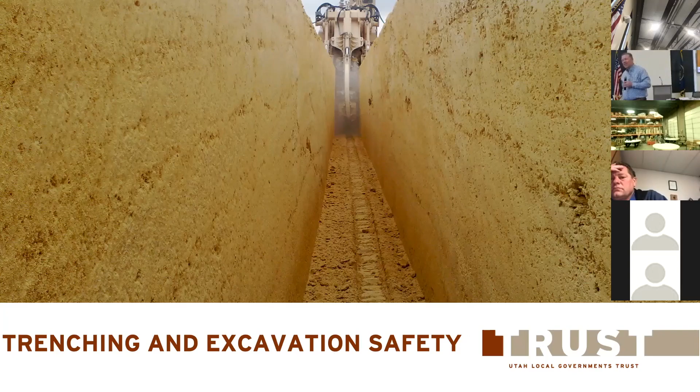Trenching and excavation, man, this one drives me batty. I think any of these fatalities are just absolutely preventable. When I see this come through the news, it just makes me sick. Man, we killed another contractor. A huge percentage of them are in Utah County. If you see a story come through, it's like, oh, another one in Utah County. I know there's a lot of construction going on down there, but it's frustrating.

All right, this one's rough. Don't watch it, you don't want to see people taken out.

And that's what he does as he pulls up. Was that the right decision? No, it was probably the one chance those guys that were in there had to survive, was that air pocket. And then he starts digging.

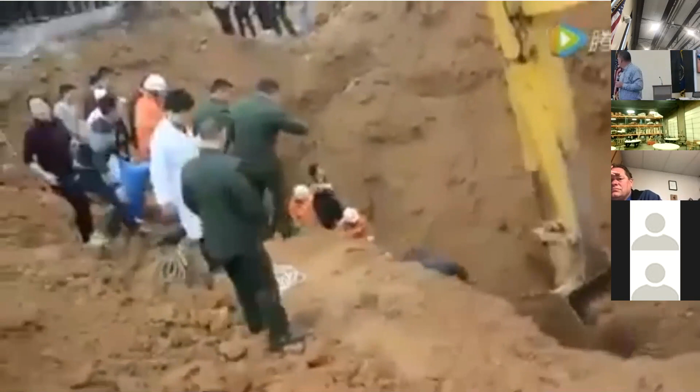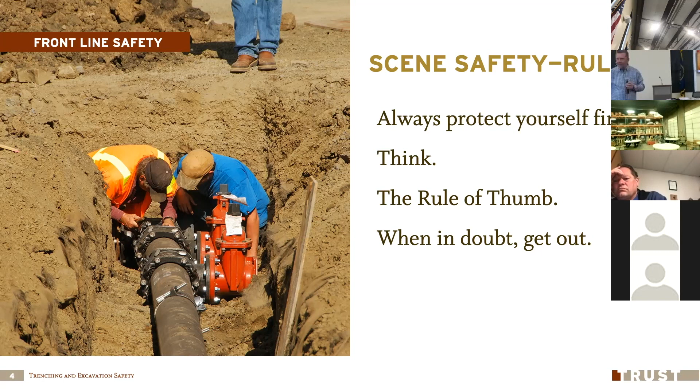But we got to think about, what are these steps if something happens? But more importantly, let's not get to that point. Let's just do it right to start with. All right, so talk about this stuff ahead of time.

Let me get to this, this is dangerous. When fatalities happen, a good percentage of these are dealing with trenches. Trenches and falls are the big ones in the construction industry. And it can happen to any one of us. I remember being a kid out on the farm, and we were digging trenches, installing irrigation lines and things like that, and I had no idea what a trench box was.

I was just a 10 or 12-year-old kid out there plugging pipe together with the old man. And I remember the trench collapsing in around us. We're going along, and I'm like, Dad, this is a little sketchy here, isn't it? He's like, well, hurry up, we're getting behind the backhoe. Probably, if you've been around long enough, we've probably seen that, and we've probably done it wrong at least once or twice. Let's make the commitment today that we're not going to do that wrong, because it can happen and it will happen. It's just a matter of time until we're in the wrong place at the wrong time.

I had one a couple of years ago. My brother calls me and he's like, hey, can you come help me? I'm like, what's going on? He's like, my trench is collapsing. I'm like, you're not in there, are you? And anyway, it happens.

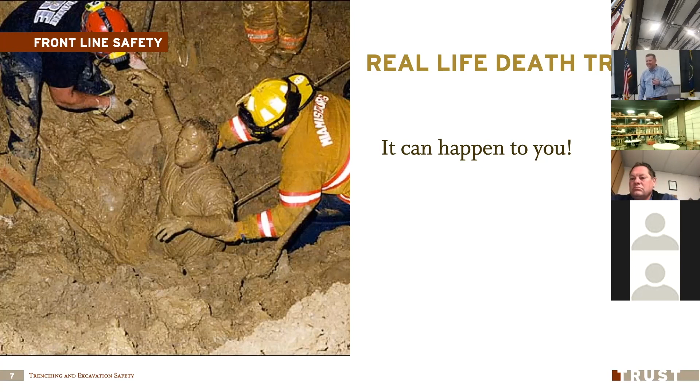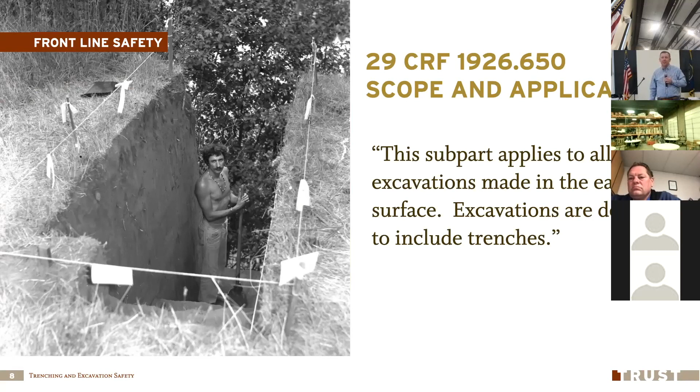All right, so this is an OSHA standard. Once again, that's what we're talking about, is this OSHA standard. And it basically says, if you're in an excavation with certain limits on it, you have to have protections in place.

So what's a trench? It is less than 15 feet in width. What does it mean if it's 16? Well, it's an excavation. So what's the idea with that? Well, excavations are still dangerous, but what makes a trench more dangerous? There's another wall, so when it collapses, it crushes you against the wall, it buries you. If this is all excavated and that collapses, well, the chance that I get thrown away or I'm safe at the end of it is a lot better than in a trench.

We have to have a competent person, just like we talked about in confined space. There's got to be somebody designated that understands the hazards and has the authority to take action on it. If it's deeper than 20 feet, things get really dicey. The physics of a trench deeper than 20 feet get really funky. And so in those cases, we have to have a professional engineer, a registered professional engineer, design this excavation.

Every trench has the potential to kill. Does a 3-foot deep trench have the potential to kill you? It absolutely does. We've had some near fatalities within the trust pool, people in seriously 3-foot deep trenches. Had a guy bent over installing some conduit, and that 3-foot wall collapsed in, folded up his pelvis, and did massive internal injuries. Just a terrible situation in a 3-foot deep trench.

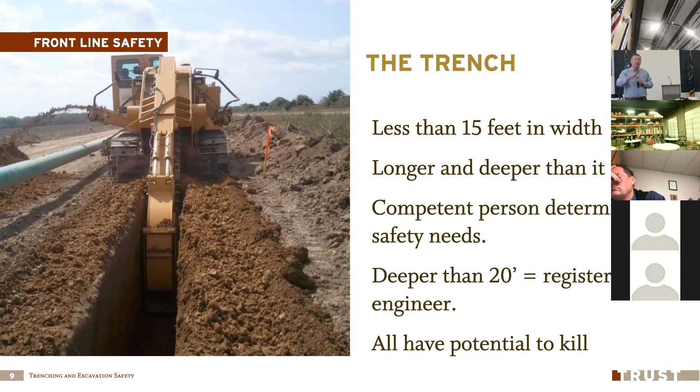So we've got to respect any excavation in the ground. Gravity is going to win. It's going to win for all of us. Eventually, we're going to be horizontal. Eventually, every one of those trenches are going to be horizontal, and those mountains up there are going to be horizontal, given enough time. Okay, gravity's going to win.

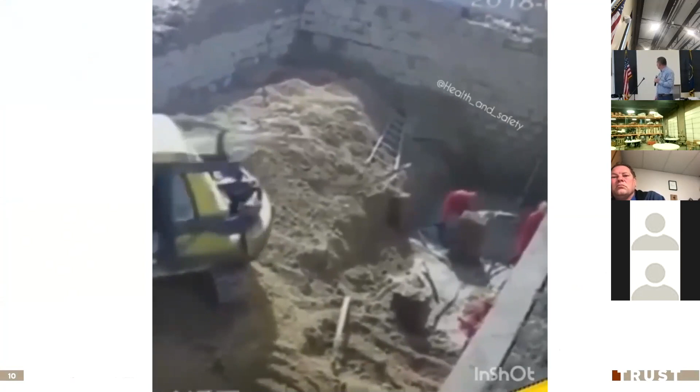Yeah, done deal, right? Concrete wall comes on top of you.

So, a competent person needs the knowledge to identify hazards and the authority to take action. So we designate a competent person.

Now, many of your organizations will have stop work authority for anybody on the job. If somebody sees something that's not right, they think we're going to hurt somebody, anybody can throw their hat in the air and say, let's step back and look at this, I'm worried about this, and then figure it out. That's good. I recommend that for everybody.

Give everybody stop work authority if it's for a safety reason. But we have to designate that competent person who's going to take responsibility. So every excavation job should have a competent person designated.

One of the things I'll send out in the email is a sheet for inspecting your excavation. That competent person should have that in their hand. That's their way to track all of those things and designate them as a competent person.

They need to be there anytime there are employees in the trench. They need to determine the appropriate protection, whether it's sloping, shielding, shoring, whatever it may be. They're going to make the call on that.

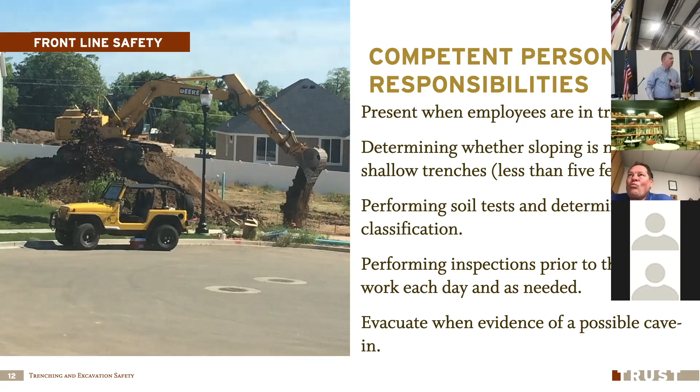Performing inspections prior to the start of the workday and as needed, and evacuating people if needed. If the competent person says, uh-oh, it looks like we might have an issue here, even if it's in a 3 feet deep trench, they have the responsibility of saying get out, let's get a trench box, let's do something, slope it, whatever it may be.

And be aware of the other hazards. Now, are utilities always where they're marked?

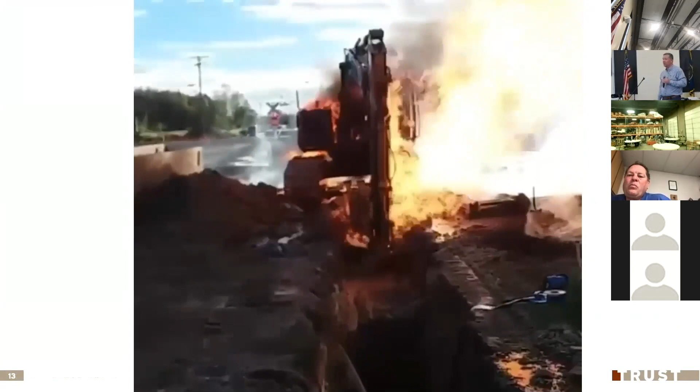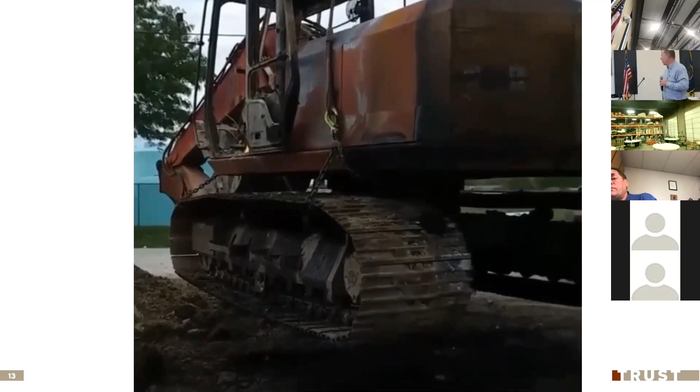So before we dig, make sure we mark the utilities. Sometimes it's you marking the utilities, sometimes we have others out there for others.

How far back from those marks do I need to stay? 2 feet on either side, right? So what do you do in that 4-foot section? You hand dig in those areas. Can you still strike a utility with a shovel?

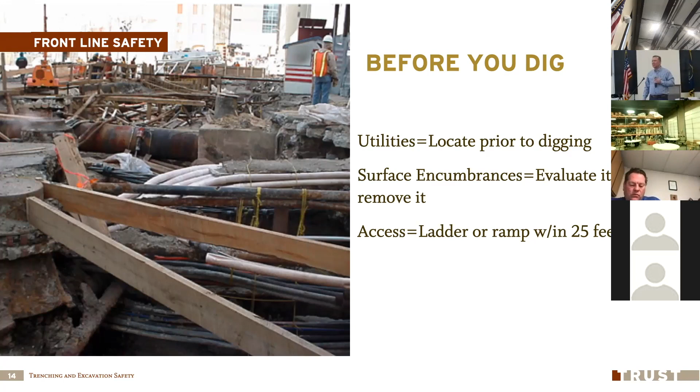Yeah. Okay, surface encumbrances. What the heck is a surface encumbrance? There's your stuff on that. What is a surface encumbrance?

We got it properly shored though, right? Yeah, a surface encumbrance could be asphalt, overhanging asphalt, curb and gutter. It could be a building, something like that that's on the surface that could collapse in on us and may need to be shored. So we've got to take steps to shore those up.

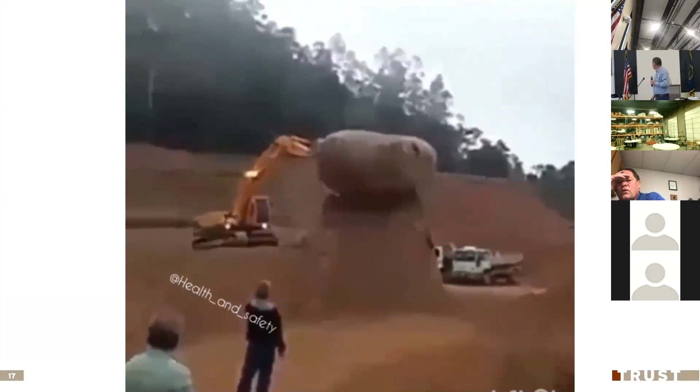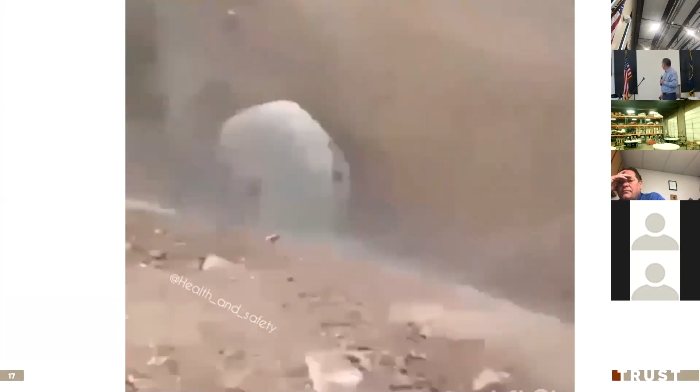They were waiting for this one all day long. It's a boulder. Impressive.

All right, so the other thing that we need to be concerned about is traffic. Most of the work that you're doing is going to be out in the right of way somewhere. So how do we control that? Well, proper traffic control, set that up right.

Does that mean people are going to be smart? Does that mean they're going to stay out of your trenches? I've worked at the trust long enough and I've read enough claims to see that people are dumb. And even with barricades in place, they're going to drive into your trenches. So let's go the extra effort on those things. At the end of the shift, I'm not done with the job, I need that trench open tomorrow. What do we do?

Cover it, plate it, or fill it back in. Don't leave an open trench unattended. If you leave an open trench, people are going to drive into it or fall into it. Kids are going to fall into it. It's a massive liability issue. So plate it or fill it back in. It's easier to dig the second time, I hear.

All right, falling loads. Just an important consideration on that. You guys are working around backhoes, dealing with pipes, installing things, fixing leaks. Do you need to wear a hard hat in an excavation? The answer is yes. I've got potentials, I've got overhead loads there. It's a construction site, you've got to wear a hard hat. But here's the big thing on this.

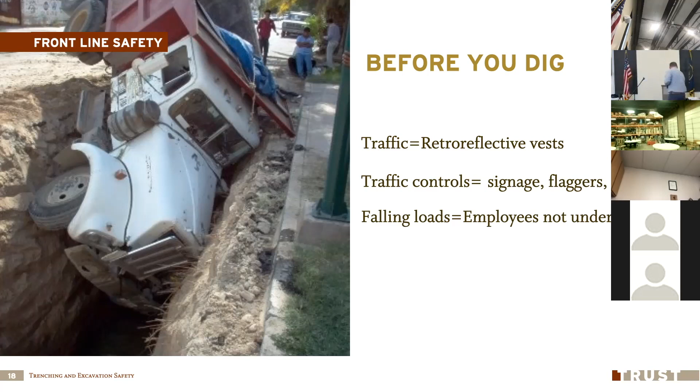All right, and traffic control, right? Wear those vests as well. You know, we may have gotten away with that for a long time without reflective clothing because it wasn't nearly as crazy. But I'm here to tell you, people are not paying attention when they're out there driving. You've got to keep yourself visible.

And when I talk about that, that really terrifies me. Every day I open up my news app on the phone and look at what's happened. And I don't want any of you guys to be dead out there. I don't want you to be hurt in something like that. And I know you're exposed to it day in, day out. You got to work double hard to stay visible and stay aware of what can happen out there, because people are texting along, they're doing whatever it is besides watching where you guys are. So work really hard to stay visible and protect yourself.

If you got to park a dump truck, or you got to put something in the way to give you that extra level of protection, do it. Okay, let's see, got back here. Yeah, I think we covered all that.

It says on there, test atmosphere. Is there a potential that we could have a hazardous atmosphere in an excavation? Like what? Carbon monoxide. Yeah, so if I got a compactor going down in a trench or something like that, I definitely could do that. Anything else? Gas off from what? Oh, gas, like natural gas. Oh, a gas saw, oh yeah. I thought you were talking about off-gassing from something else. But you could have a utility line, a natural gas line leaking.

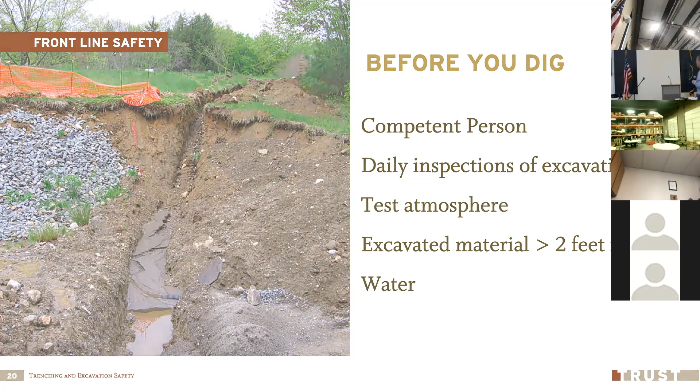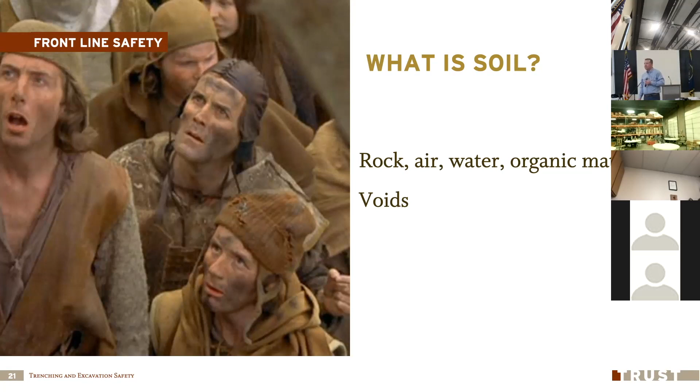Okay, all right, so what's soil? Soil is a combination of a lot of things. Is there air in soil? Yeah, can be. Organic matter, breaking down organic matter. But at its base, it's made out of rock, really small rock. Sometimes it's large rock. Clay is stuff that's been broken down a lot more, and it gets down to a really fine content or fine consistency. All right, so soil is heavy. It weighs about 100 pounds per cubic foot. How many cubic feet in a cubic yard?

Ooh, that's a tough one. 3 by 3 by 3, that's 3 cubed - 27 cubic feet. Times 100 gives us almost 1.5 tons in a yard.

So if that yard of soil collapses on you, guess what? You're toast. We're basically dropping a car on you when that collapses.

This guy that passed away last week - I apologize, I'm just pulling something from the news, don't know if anybody's close to this person - but the guy got buried. They dug him out, and then he crashed and died. Why? Massive internal injuries. Anytime we get this massive pressure there, I think he maintained consciousness until they pulled him out, and then he just crashed and died.

The pressure causes internal injuries, and just the pressure itself, you can bleed out when they take that off. That's another reason why we want emergency responders there if an accident happens, because they have ways to help prevent that when they take the pressure off. If we just dig somebody out, it can instantly cause hypovolemic shock - all of your blood drops out, and it's just like the pump isn't primed anymore.

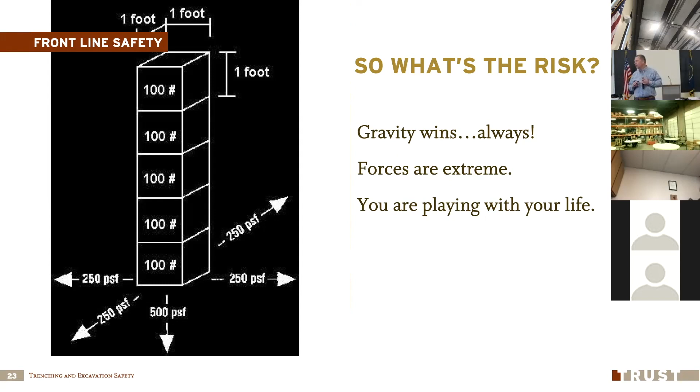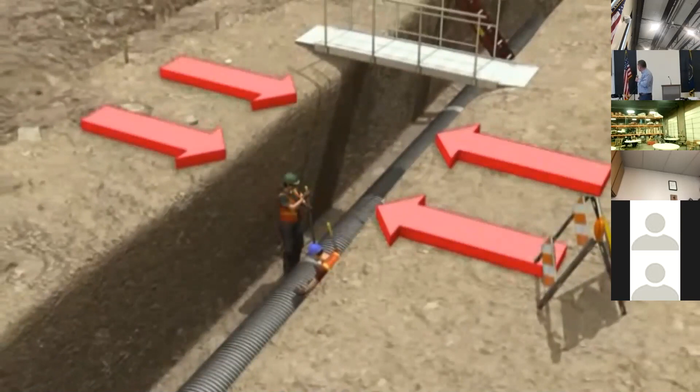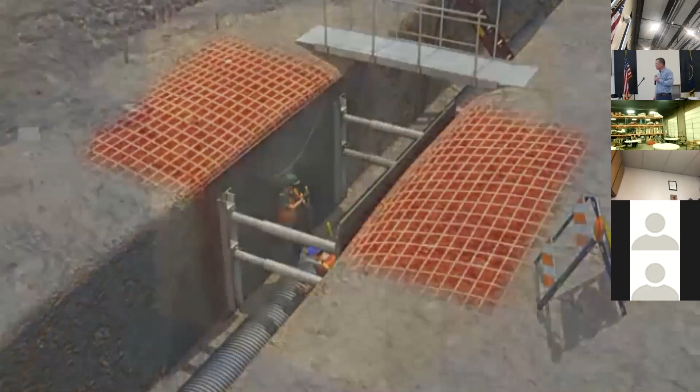What is the purpose of a trench box? Is it to keep the walls up? It's to keep the workers safe. We know it's going to collapse eventually, so we want to keep people safe.

A lot of times we see there'll be a little subsidence at the bottom of a trench. What does that do to the overall trench? Well, it weakens it, right? The bottom of the trench falls away - there's no base, there's no foundation under that wall.

Sometimes collapses are a multi-collapse event. I get that little kick out at the bottom, but I just keep working because we've got to get this pipe in. Then there's a secondary collapse, and it pushes me against the wall and pins my legs. Generally I'll have at least one person in every class I teach trenching that's been buried - some people buried up to their ankles. I'll ask the question, you could just pull your feet out, right? The answer is no. The weight, the pressure involved with that, you're there.

So I'm buried to my ankles or my knees with that secondary collapse. Now what? Do we jump into the trench and start digging me out? No, because when I go to jump into that trench, I may cause the third collapse, and it might be both of us totally buried at that point. Now, am I going to throw a shovel into a guy? We're not going to do that, right? Because we're going to do it right.

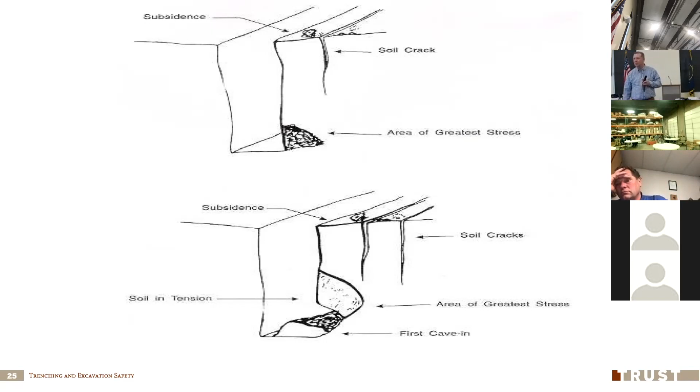But let's say I came on that situation, and there's a guy buried down in there up to his ankles or up to his knees. Yeah, I'm going to give a shovel to that guy, give him a chance, right? At least we'll be able to find the shovel as we're digging him out, and it'll let us know that we're on the right track to finding the guy. Okay, all right.

So, various different types of collapse. Sometimes we get our spoil pile too close to the edge. How far away should my dirt pile be from the edge of the trench?

What'd you say, 2 feet? At least 2 feet from the edge of the trench. Why? Weight, right? The more weight I have on there, the more it's pressing down on the edges of the trench.

The other thing is sometimes it can just slide. That's the spoil pile slide, where it just slides off the top of the trench. Similar to that is the lip slide, where that very top part of the trench a lot of times gets broken up as you're digging it. That's the lip that will slide in.

The belly slough is one that we might see. You said North Salt Lake's got variable soils, so sometimes I've got layers of soil. Maybe I've got clay on top, then a layer of gravel, and then clay in the bottom of the trench. What's the weakest part? Well, the gravel is. We get this belly slough where the middle of the trench kicks in. Now what do I have?

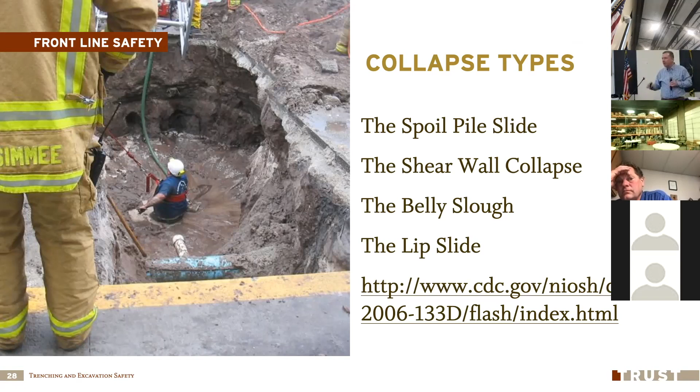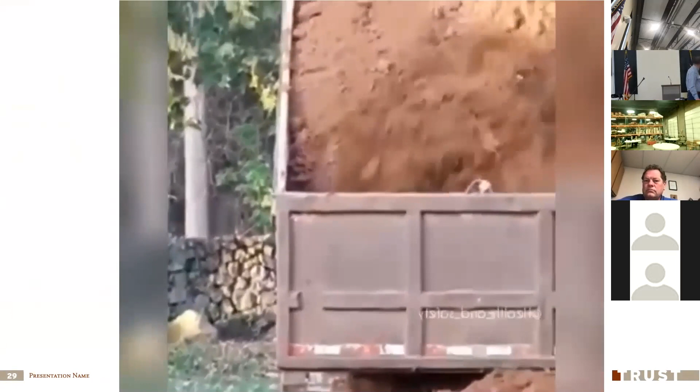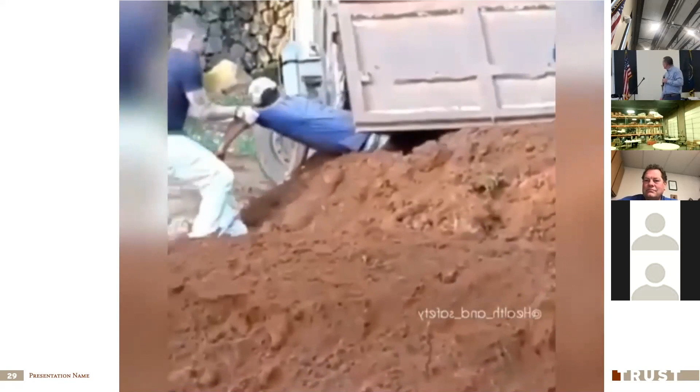All right, oh, this one drives me batty. You can tell when it's a real video, right? Because they pan away, they miss the money shot. Oh, just drives me batty.

All right, so let's talk briefly about types of soil. I have 4 soil types. One is solid rock. Now, we don't generally see a lot of that in most of our areas, but you go down to Moab, you can have slick rock, right? I've got sandstone. That's the most stable soil we have, right? If I can chip a trench through that solid rock, it ain't going anywhere.

Okay, then we have gravel, sand, and clay. They're the general types of soil that we see, and there's a lot in between those different types.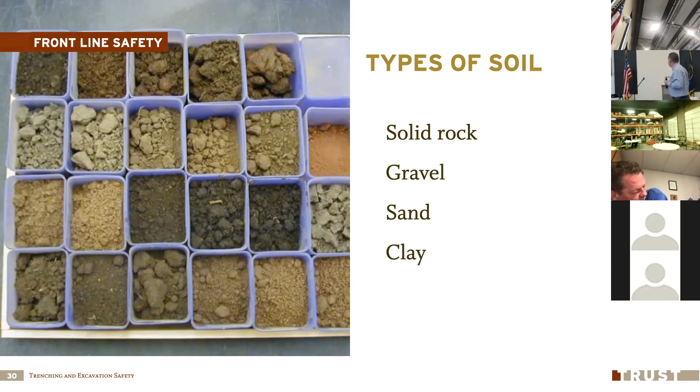Of the other 3, which will be the most stable? Clay. Will it always be the most stable? No. Why? What can I do to clay to make it unstable? If I get it wet, it can turn to jello.

All right, so we're going to classify soil though, and we have solid rock, and then we have 3 classifications, type A, B, and C. Which is the most stable, A, B, or C? Type A is the most stable soil. C is the least stable. And here's the rule: treat everything as if it's type C soil, and then you're covered.

Okay, when do we use type A, B, or C? The only time I use that, besides just my general knowledge of, hey, this is a type C soil, this is a lot more at risk for collapse. The only time I really use this information is if I'm sloping. So if I dig a trench and I want to use sloping as my protection, if it's a type C, I slope it 1.5 to 1, and then I'm covered. So of all the time we spend on this, that's really what it's all about.

Type A, B, or C is my slope. It has to be a lot flatter on type C soil. Okay, so always treat it like that. But we do want to identify it, the different types.

So I do at least one manual and one visual test. A visual test, I look at it, and I'm at a gravel pit, and I can see cobble rock rolling out. What is it?

Well, those particle sizes are really big. The bigger the particle size, the less stable it is. So you think of that compared to clay. You can't even see the particle size in clay because it's so small.

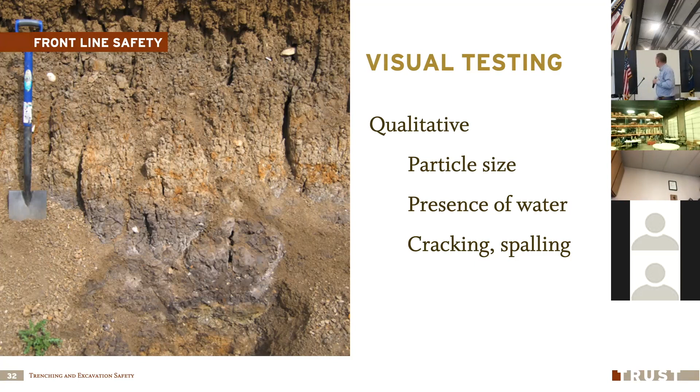So, particle size. Gravel can be type B or C. What's the difference? It's angular gravel versus round gravel. What's the difference between river rock, gravel right out of a gravel pit, and crushed gravel?

How does it... it what? More edges, and so it locks together, and so your angular gravel can be type B. It's a little more stable. But once again, I go back - treat everything as type C, and then we're protected.

Sand, you guys know what sand is? Then we have silt and clay, and so our particle size gets smaller and smaller on those.

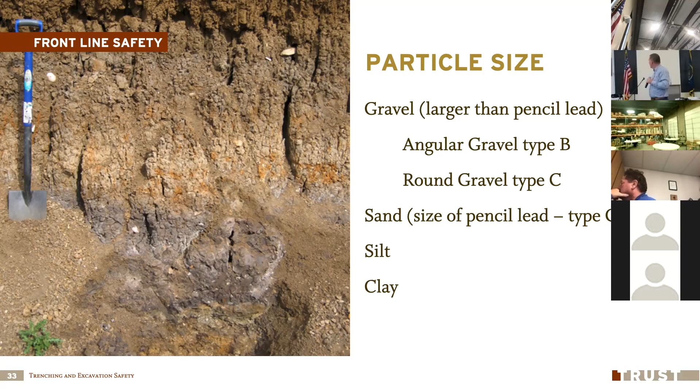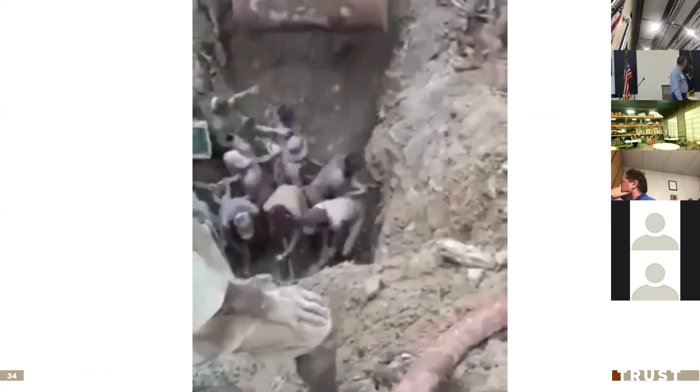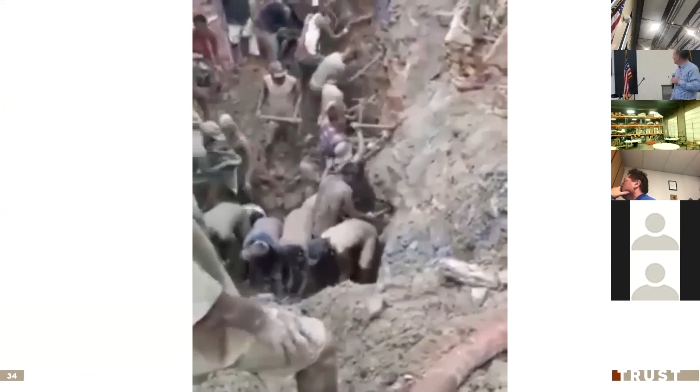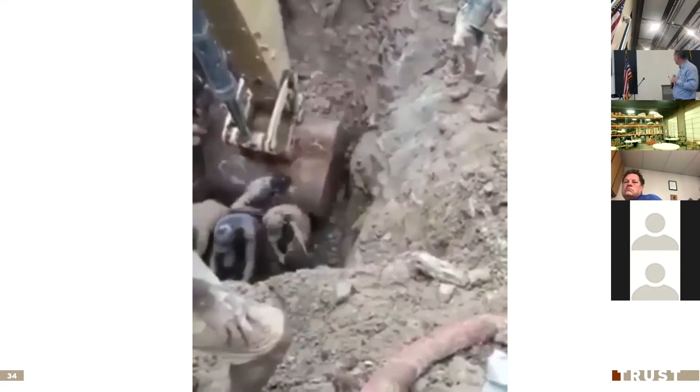Oh, another one. That's when actually they don't get buried, but... I think it's diamonds, yeah. And the crazy part is then, he's just going, he's just digging, and everybody has to bail out. And then they dive right straight back in. Is that amazing? Oh. Or how many people that weren't coordinated.

So here's some warning signs for soil. If I see cracks in the soil, that's just a warning sign that says this is less stable. Spalling, the little flakes coming off. Sloughing - what does that mean?

Yeah, it just slides out, kicks out of the bottom. Heaving, what does that mean? There's pressure coming on that.

Boiling? What's boiling? Have you ever seen at the bottom of a trench, you may have water in there, and you'll see little particles bouncing around? What's that telling you? It's telling you I've got water, I've got hydrostatic pressure there forcing water into that trench. What does that tell me? That's a huge warning sign, right?

Not only does this trench want to tip over because of gravity, but I've got water pressure forcing through here. And as that water moves, it's weakening all of that soil, okay? Water equals danger in a trench.

All right, so those were visual tests, then we do manual tests. We want to test the cohesiveness of the soil and the compressive strength. Cohesive means how sticky is it? Okay, so I've got my - I'm not going to get Play-Doh on my hands today.

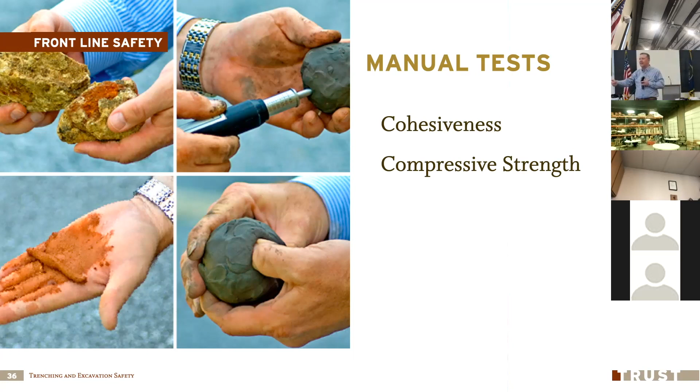Compared to - we go out and we have some heavy clay here, dry heavy clay, and I take that and I try to shove my thumb into that clod. I can't even dent it with my thumb. Okay, that's one of the tests that we can do, called the thumb test.

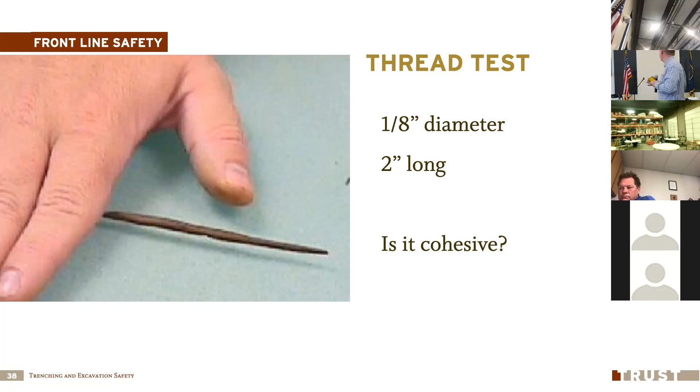We'll talk about the thread test. If I take this Play-Doh, I can roll it into a thread about 1/8 of an inch. And if I can pick up about 2 inches off the table without it breaking, we'll say that is a cohesive soil. Another test we do is the ribbon test.

I do a similar thing, roll out a little bit bigger roll of this, and then start squeezing it, making a ribbon out of the soil, and let it roll off the side of my hand. If I can get a couple of inches hanging off the side of my hand, then that's a cohesive soil.

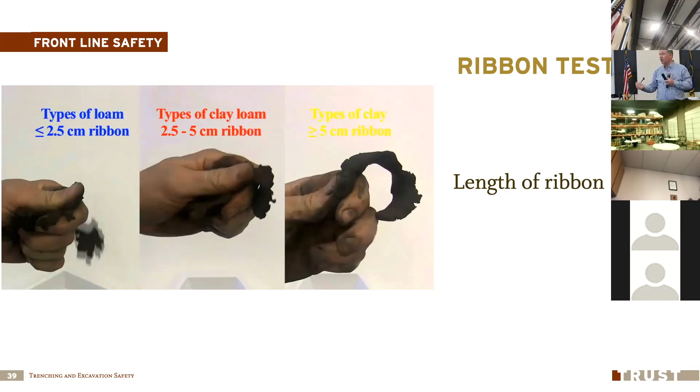Okay, just go back to the other side. If it's sand, is that going to work? It's not going to work. So you'll get it if it's cohesive soil. You grab some in your hand and start working it, you'll get an idea pretty quick whether this is cohesive or not. The thumb test, like I talked about, put pressure on it.

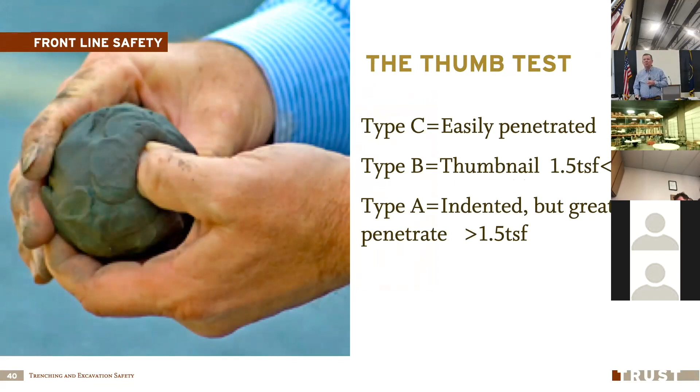The thumb test is good for just a quick qualitative test, but it doesn't give me much, because everybody's thumb is different, right? Everybody gives a different amount of pressure. So we have tools that we use for that.

We call this a pocket penetrometer. It's spring-loaded, you can see this moves. I'll put this little red band down here, and push it into the clod. On here, about a 1/4 inch in, there's a red line. I need to push it into the clod until it penetrates to that red line. When I do that, it's going to put pressure on that, and then I'll look, and it says 1.5.

1.5 translates to tons per square foot. So with type A soil, it's 1.5 or greater tons per square foot. Super easy way to read it.

If you're the competent person, you should have one of these on your excavation sites. OSHA shows up and says, 'Hey, who's the competent person?' And then the competent person walks out with a pocket penetrometer and their sheets showing their inspections. It's a good day, as long as you got a trench box in, right?

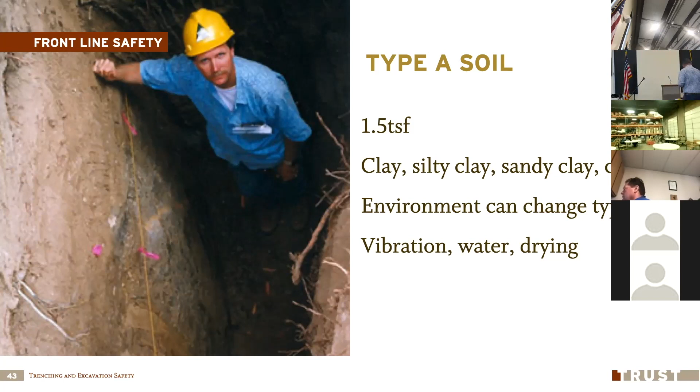All right, so that's an easy way to test the compressive strength. There are other ways to do that as well, but we won't go into those today. It's not a type A soil. So going back to our reading, 1.5 tons per square foot and above is type A soil. In between 1.5 and 1/2 ton is type B, and less than 1/2 ton of pressure on that compressive strength is type C soil.

It's not type A if it's fissured, if it's got cracks in it, if it's subject to vibration - you jiggle this stuff and it starts turning to jello. If it has been previously disturbed - how much of your soil that you're digging has been previously disturbed? Most of it, right?

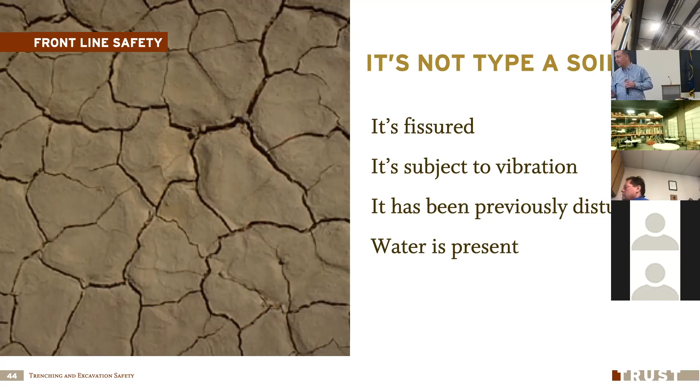So that's why I just come back to treat it like type C. I'll go through the training, we talk about, well, this is type A, and that'll help you feel a little bit better about your trench. But if we treat it all as type C and handle it appropriately, then we're protected. If water's there, it's not type A.

Vibration is also another big factor, particularly out in an area like Woods Cross where we are - is this soil subject to, they call it, liquefaction in earthquakes? Is this subject to liquefaction in this area?

Yeah. You know, it was funny, back in March when we had that earthquake, we were all in lockdown. I was working from the home office, and that earthquake hit, and I was like, wow. And I looked and I'm like, well, nothing's breaking, this is kind of cool. And then I talked to some of my coworkers, and they lived in an area where it was much more subject to liquefaction. They were terrified of this earthquake. They were like, everything was falling off the shelves, everything was shaking around, and their kids were freaking out.

And they were terrified of what happened in this earthquake. That's when we start talking vibration, that's really what we're talking about - some soil, when it's subject to vibration, will just turn into jello.

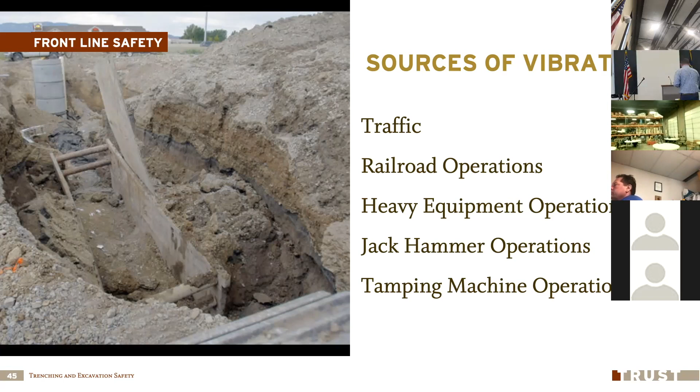All right, so we talked about all of this stuff. I'm going to jump into the next topic.

We had one a few years ago, fire department, out on a bad wreck on the freeway in wintertime, slick roads, foggy conditions, and a semi comes barreling out of the fog going fast. They're standing out there trying to deal with the wreck, and this firefighter backs up to get out of the way, and he backs into the fire engine. He's standing right next to the fire engine, and the semi blows along and runs over his feet.

This guy was a few extra Big Macs away from dying, right? He's sucking in the gut so he doesn't get hit, anyway, it's just amazing that we didn't kill him. Got to stay visible, do what you can to protect yourself.

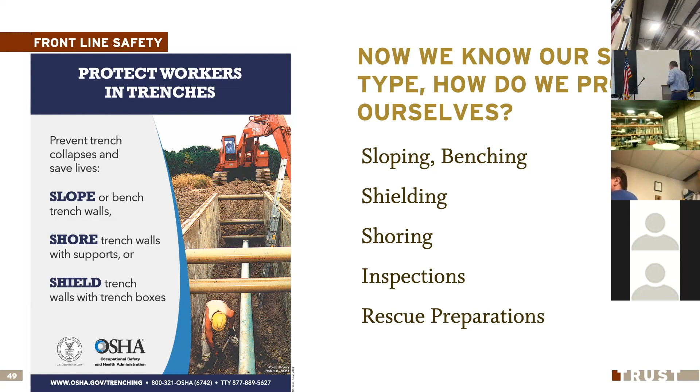Okay, all right, so let's talk about these things. Uh-oh, here we go. I think you can make it.

So at 4 feet and above, or deeper, we need to have something to help us access that trench, meaning a ladder, a ramp, or something to help us in and out. Under 4 feet, I don't have to have that. I can climb in and out.

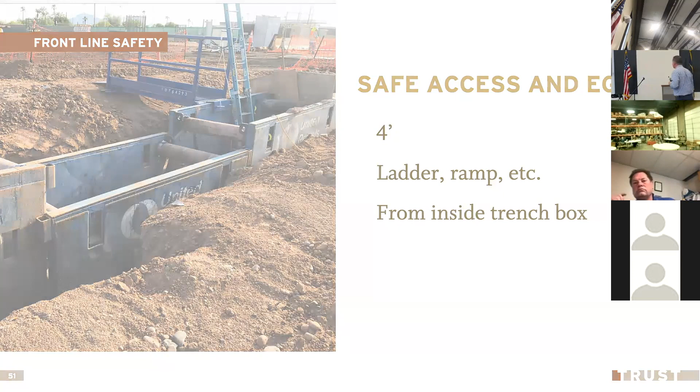Now, if I've got a ladder and I've got a trench box in there, where does that ladder have to be? Can I have it outside of the box? No, I've got to use that from inside the box, so it's not exposing me to collapse.

All right, and appropriate protection for crossing trenches. Here's the OSHA standard on this. It says each employee in excavation shall be protected from cave-ins by an adequate protective system designed in accordance with paragraph C of this section.

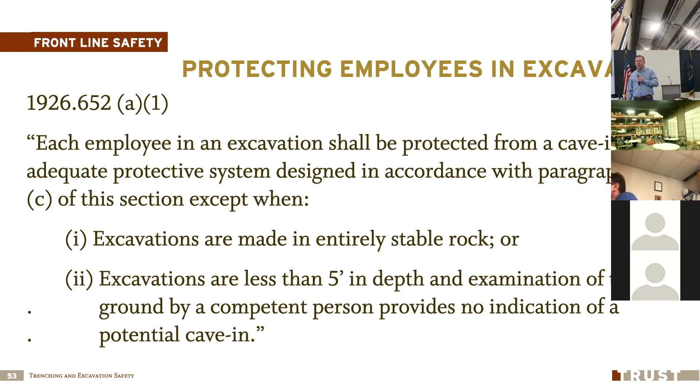Except when it's in entirely stable rock, or excavations are less than 5 feet in depth, and examination of the ground by a competent person provides no indication of a potential cave-in. So a competent person is essential on that for the less than 5 feet. Questions?

It's better with sound, actually. It's that nice aluminum bat sound. Cling. All right.

Sloping or benching. Now, the difference between sloping and benching is what? With benching, I'll dig my initial trench, and then I'll raise up, and I'll dig another trench along there, and then raise up. But with sloping, it's an actual slope. But the angle is the same for sloping or benching.

So if I'm in type A, 3/4 to 1; type B, 1 to 1; type C, 1.5 to 1. Not going to spend a lot of time on that because we're going to call everything type C, slope at 1.5 to 1. What do you find if you are sloping 1.5 to 1? It's a big excavation, right? It generally is not going to work in most cases because it goes so wide.

So if you go online, there's a website, trenchsafety.com, and they have a trench slope calculator. You can put in the width of your trench, the depth of your trench, the type of soil, all of that, and it will tell you how wide. It'll give you a diagram and show you how wide you have to go to get the proper sloping. Guess what trenchsafety.com sells? They sell trench boxes. Why would they put a sloping calculator on there if they're selling trench boxes?

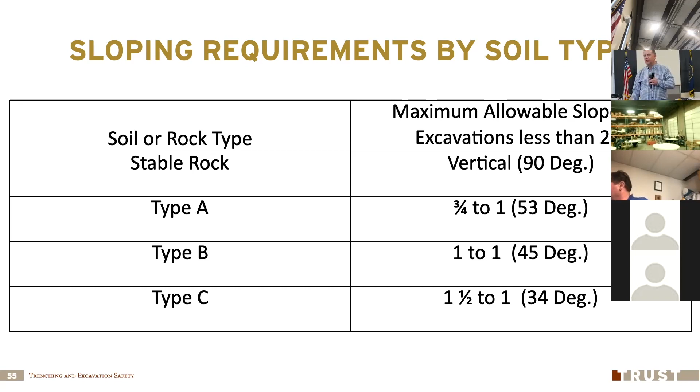Because when you really do it right at 1.5 to 1, you're going to use a trench box, unless you're out in the middle of nowhere and you've got nothing but room. But you're going to be hauling and moving so much soil that it just doesn't make sense. So the trench box or shoring is where you're probably going to end up.

Your warranty expires on your... I thought it was your car warranty expiration. They're giving you a call.

So I could have a compound slope, but what happens if the type C soil is on the bottom? Everything's got to be 1.5 to 1. Okay, all right, yeah, we covered all that.

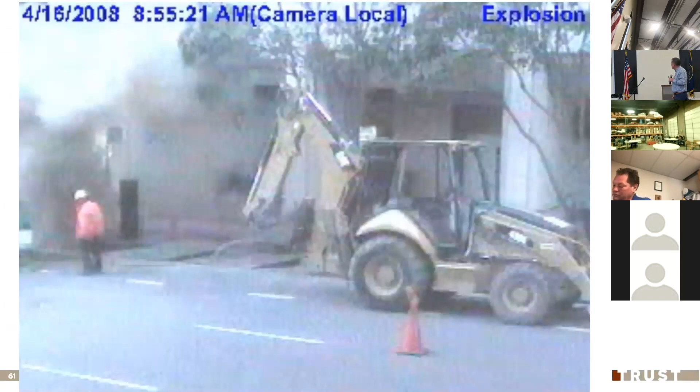See that guy crawling out?

All right, so I talk about a trench box. The technical term is a shield. What does a shield do? It shields you from collapsing trench walls.

They're a design engineered system. I can't go out in the shop and just weld something together and call it a trench box. So there are specific things that have to go into it, and it has to be engineered.

Do they have to be made out of steel? No, they have some great light little aluminum trench boxes for trenches of less depth, but they're lighter and easier to haul around.

Let's just talk about a couple of things. Down at the bottom of your trench box, it's pointy. We call that a knife edge. What's the reason why we have a sharp edge at the bottom of the trench box?

The idea is the backhoe operator should force that box down in so those sharp edges dig down into the bottom of the trench. So if I have a collapse, that force doesn't cause the box to tip over or be thrown to the side into the occupants that are inside of there, okay?

We have the sidewalls, they're heavy, beefy sidewalls, and then I've got spreaders in there. Generally I'm going to have top and bottom, but sometimes there are other designs where they don't necessarily have to have that. If I lose one of those, can I just go to the shop and get a piece of pipe?

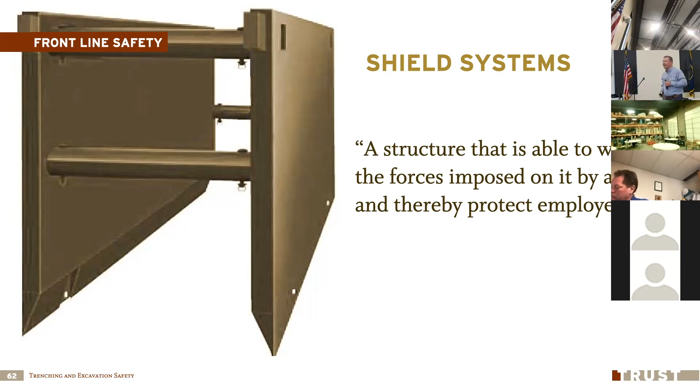Now, once again, it's all an engineered system, even down to the fasteners that put everything together. If you lose stuff, go back to the manufacturer and buy the appropriate stuff, okay? So if I'm lifting this stuff around, that rigging that I'm using should be certified for lifting.

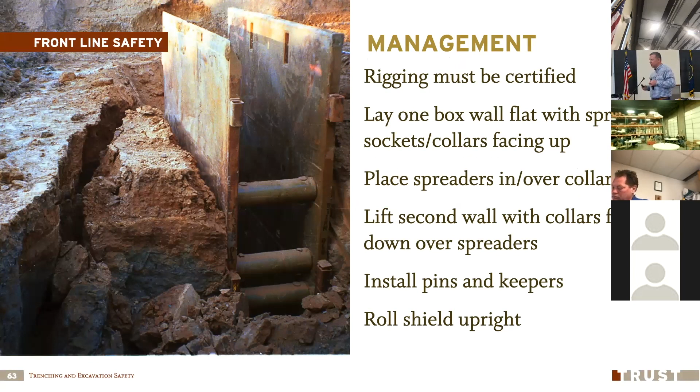I'm not going to go into putting these all together, but let's just talk about how do I use a trench box. Oh, this one's actually pretty cool, and then it'll lock in place. All right, so installing in stable soil, and really there's one difference between stable and unstable soil.

I'm going to cut the trench, make sure my spoil pile's back at least 2 feet from the edge, lower it into the trench. I will force it down in so those knife edges dig in, and make sure we've got proper egress and all of that stuff.

How do I move that? Let's say I'm installing pipe and I'm digging and moving the trench box along. The difference between stable and unstable soil: in stable soil, I just drag it forward. Unstable soil, I lift it up and then set it down.

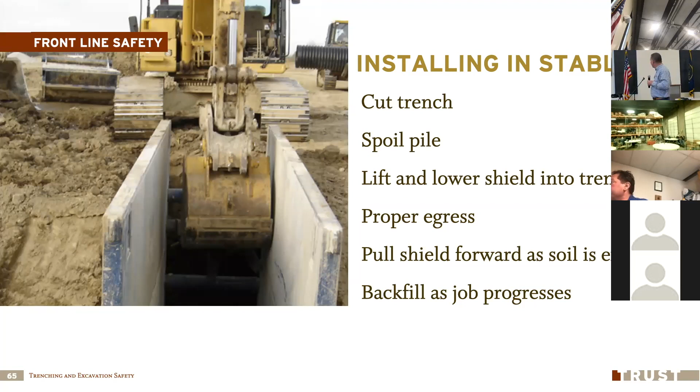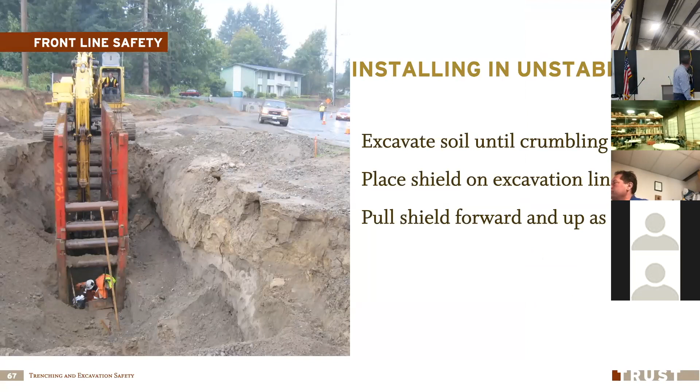Okay, can I move it with people in it? No. They have to evacuate that when I'm moving. Yeah, I'd be a little nervous about that. Okay, I think we covered that.

Limitations: if they're damaged, don't use them. And I know these things get beat up, and that doesn't mean scratched and stuff like that. But if I've got a damaged spreader, those pipes are bent, or missing parts, don't use those.

What's the appropriate box for the job? How do I select the right shield for the excavation that I'm doing? What's the height going to be?

At least up to the top of the trench. I'd prefer it to extend above the top of the trench, in case that spoil pile isn't - we want that 2 feet away, but so stuff doesn't come in on top of us.

How about the width? Does that matter? Yeah, if I've got a 2 foot wide trench box and my excavation is 8 feet wide, that's no good, because it can tip the thing over. So it needs to be the right width for the job.

When you get into deep trenches, these shields have to meet certain requirements. There's a table that shows exactly what they have to meet, and it gets a lot harder to meet those requirements the deeper we get, so they're going to be a lot bigger, heavier, et cetera.

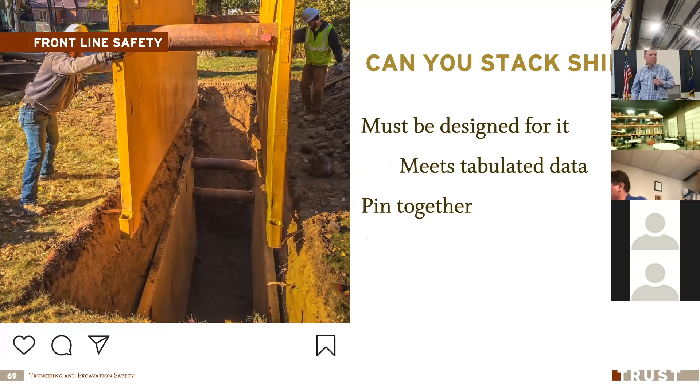Can I stack trench boxes on top of each other? Only if they're designed to do that, and then they have to be pinned together so they don't slip off. So yeah, I definitely can, but they have to be designed for it.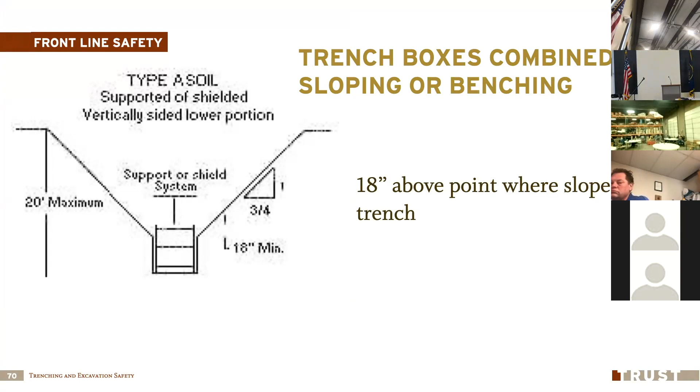If I'm going really deep, can I use a combination of sloping and a trench box? The answer is yes, but down at the bottom, that trench box needs to stick up at least 18 inches above that point - this point right here needs to be at least 18 inches above.

Okay, covered all that. Doing good.

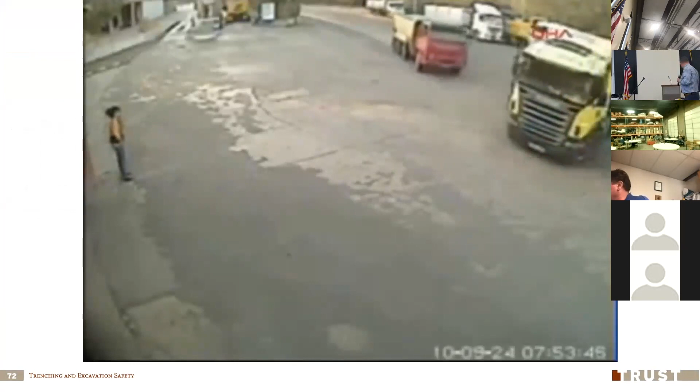Ouch. You notice he started from the opposite side of that truck. He flew all the way across the inside of the truck and then out the window.

All right, what about graves? Is that a trench? I don't know if anybody on here has a cemetery - if you do, I just published 2 videos. I just published 2 videos on our YouTube channel last week, one on cemetery safety, one on cemetery risk management. You ought to check out the cemetery safety one, it's got a little Halloween bent to it. Anyway, I use this as an example because sometimes we'll look at that and say, well, it's just digging a grave - is it a trench?

Yeah, it meets the definition of a trench. Is it a dangerous trench? Yeah. Is it over 5 feet? Is it previously disturbed? In a lot of cases, we already planted grandma, and now it's time for grandpa to go in there, so it's previously disturbed soil. Is it wet? A lot of times those cemeteries are really wet - we like those, the only place we put more water on is the golf courses, right? We want them to look really good.

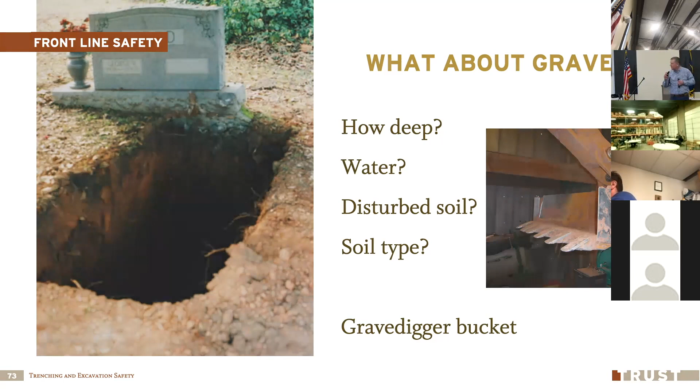Shoring. We won't spend much time on this because in most cases we're not doing it much. In shielding, we're trying to protect people when the collapse happens. In shoring, we're trying to keep the collapse from happening. We do that by putting in shoring materials, plates on the walls, and using pressure, hydraulic pressure, to hold those walls up. Why do I want to keep the walls up? Sometimes those trench walls are underneath a building, or a road we don't want to collapse, or an irrigation canal, something where I want to preserve the integrity of those walls. That's when I would do that.

In most cases, you're going to hire a contractor to come in and either do the shoring for you or do the excavation for you. So that's why I don't spend a ton of time on this, but let's talk about a couple of basics.

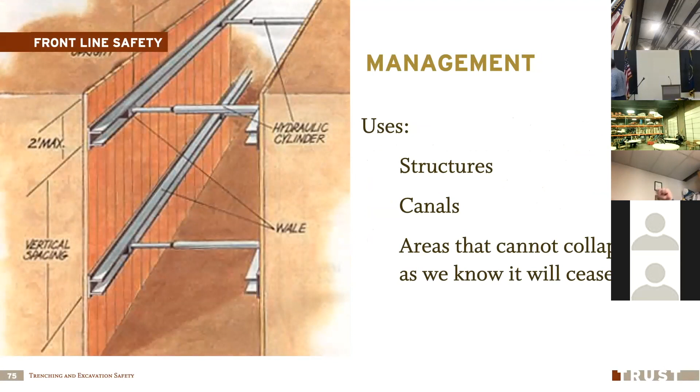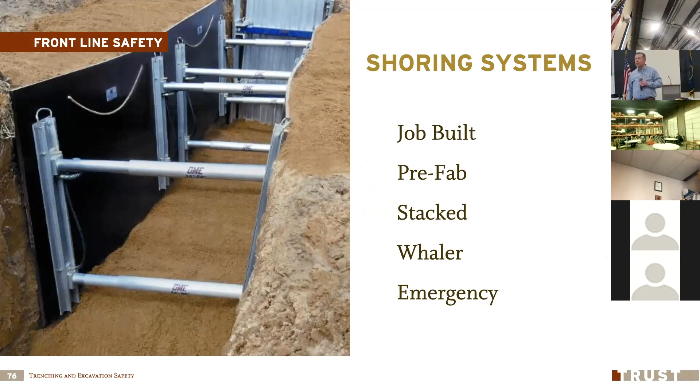We install the shoring from outside the trench. Here's a good example of a portable shoring system. You can see there's some ropes dangling there. I can drop all of this in from outside the trench, set it in place, and pump it up, putting pressure in place before I ever put any bodies in there. Install it from outside and ensure it's appropriate for the type of work we're doing.

All right, one more video and then we're just about there.

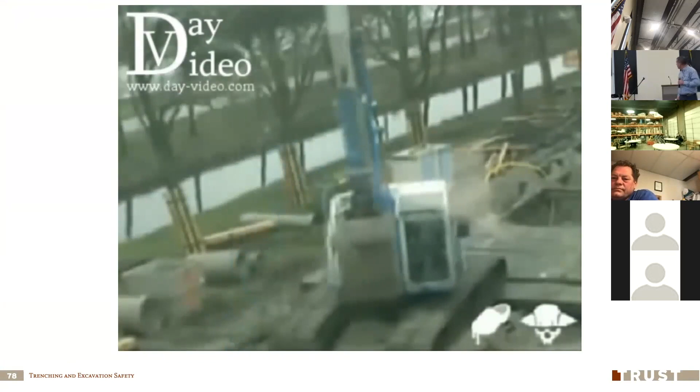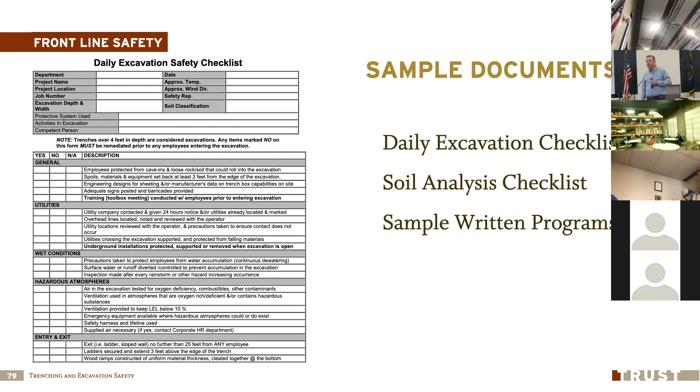All right, so I will email out these sample documents. I think these are the last two pages I'll send out: a daily excavation checklist and a soil analysis checklist. Simple things, you can print them off front and back. This is what the competent person should have, and it will help them meet their obligations under this. Yeah, we covered that.

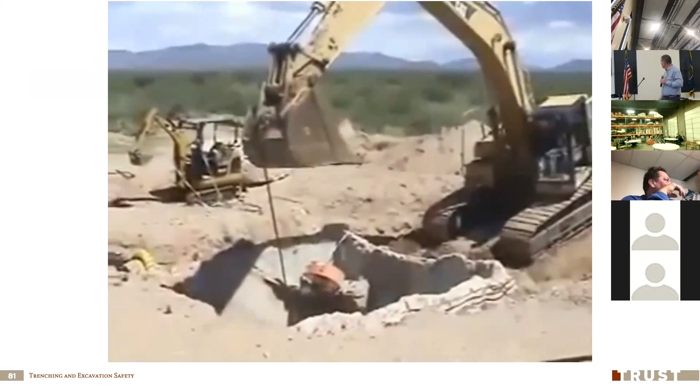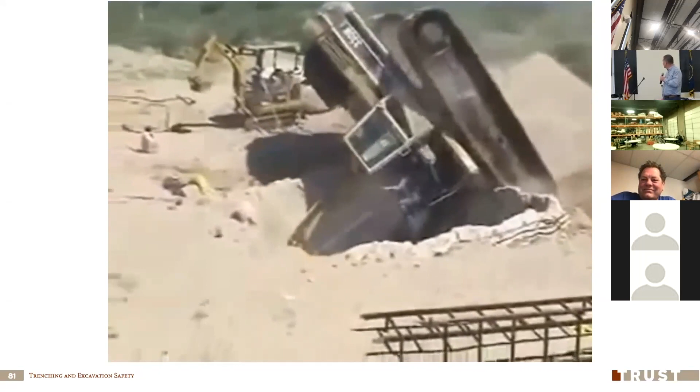I thought we were down to our last video, but we've got more. There's this big rock block down in the bottom they're trying to lift out. Just about got it. Ooh. And wear your seatbelt, all right.

We talked about confined spaces. Let's talk accidents really quick. Same thing goes from what we talked about in confined spaces: time is of the essence, and it's not on our side if somebody gets buried in a trench. How long does it take for the fire department to come out and stabilize a trench before they can even try to do a rescue? A half hour is more than optimistic. It could potentially be hours, and at that point it's a body recovery. So our option is to do it right to start with and not get anybody buried in a trench. It may be too late anyway even if the fire department got there quickly. Do it right, have that shoring and shielding in place, and be smart. Have your competent person, and all of us being aware of what those hazards are in the trench.

If you see something that you go, oof, that's a little sketchy, share that information. You're not the competent person, but you go up and say, hey, I just saw this in this trench. I know we thought it was okay because it was 4 feet deep, but I got water running into that trench. Talk to the competent person, say hey, let's pull off, let's get a shield into this situation. Just make a commitment: we're going to do it right, because no job is so important that you can't take the time to do it safe.